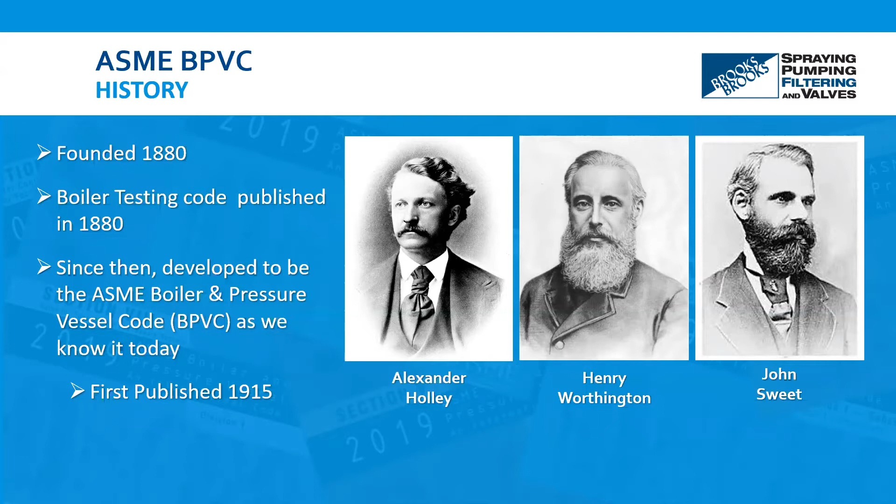A bit of history on how the ASME pressure vessel code came to be. The American Society of Mechanical Engineers was first founded by these three gentlemen, over the need for a unifying body to aid in the design and development of standard tools and machine parts. As industrialization led to increased use of steam boilers, there were unfortunately many incidents that led to injury or death, which warranted the eventual formation of the ASME Boiler Pressure Vessel Code in 1915.

It should be noted that there's always a tailwind when it comes to safer and sound design, and therefore the code is actually updated every 2 years to ensure that it incorporates new findings.

To recap the previous webinar on the ASME Boiler Pressure Vessel Code, its purpose is to help provide requirements as it relates to the design, fabrication, inspection, testing, and certification of pressure vessels at either internal or external pressures. For the purpose of this seminar, we'll be focusing on the pressure vessel side, which is section 8.

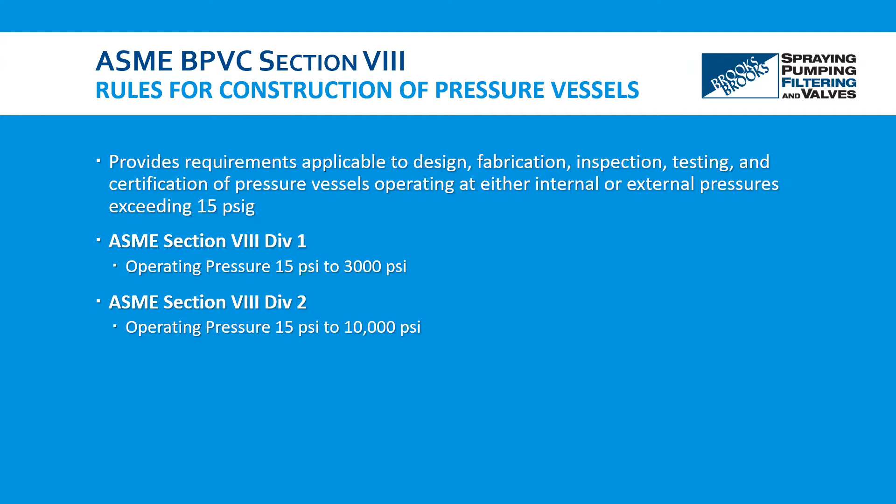Section 8 is comprised of 3 divisions. Division 1 is the most commonly used all over the world. Division 2 is specific for what's called engineered pressure vessels, and this requires additional methods for stress analysis. It also has a more elaborate scope of non-destructive examination and increased protocols on fabrication and material control. You can also see that it has a higher operating pressure allowed. Then section 8, Division 3, is specific for designs that are over 10,000 PSI.

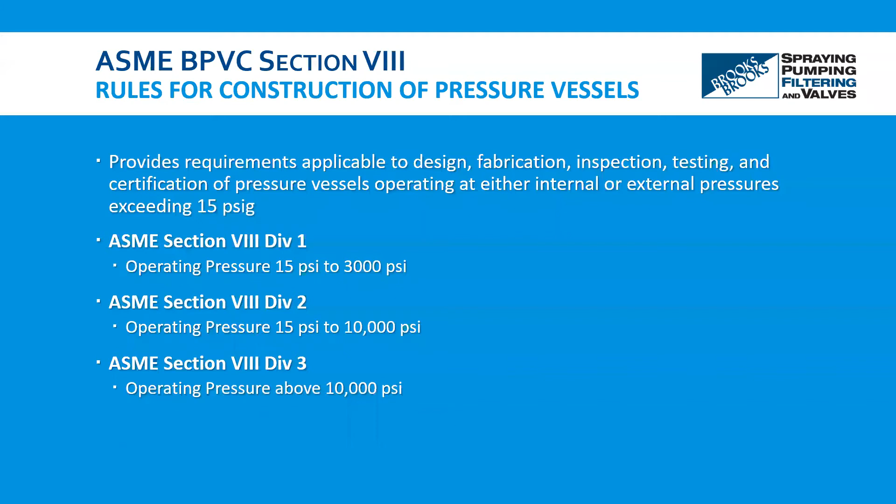When we're comparing different pressure vessel codes now, we'll be looking at divisions 1 and 2 only, as we are not getting into high design pressures over 10,000 PSI for division 3.

CSA B51 is listed here. It's not necessarily a different pressure vessel code, in the sense that it actually adds upon the ASME code and provides clarifications. As an analog, for those familiar with the Canadian Electrical Code, its short form is CSA C22.1. In this case, for boiler pressure vessels and piping, it's CSA B51. Then we have the Pressure Equipment Directive, EN 13445, which consolidates a number of parties and nations - British, Dutch, German, and French.

As you might imagine, it can be difficult to navigate through this code, as it actually points towards different other codes that are difficult to acquire. That's partially the reason why ASME is preferred, due to the ease of navigation.

And then finally, we have the PD 5500, which is the British standard. It's now superseded by the Pressure Equipment Directive. However, there are still countries that do utilize PD 5500.

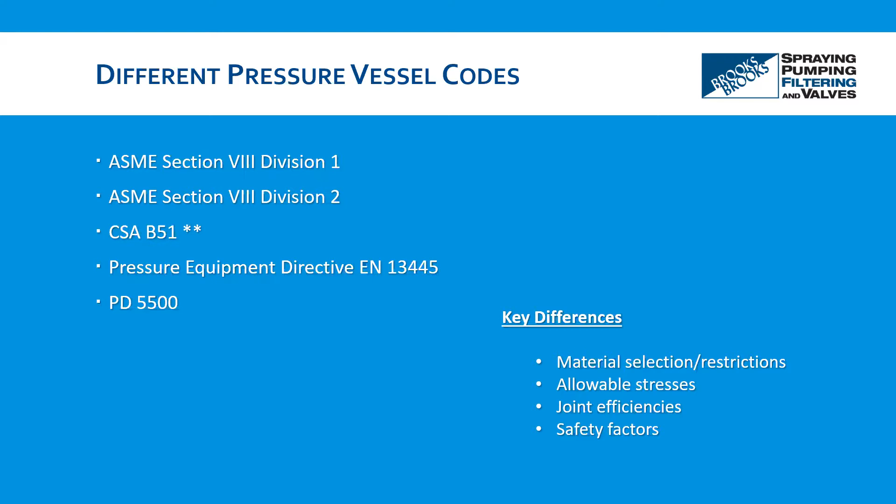Hey Annie, since we're jumping into a couple calculation examples soon, it's my understanding that part of your interview process was rather unconventional, in the sense that you were asked to perform code calculations. Oh, Annie, I think you might be on mute.

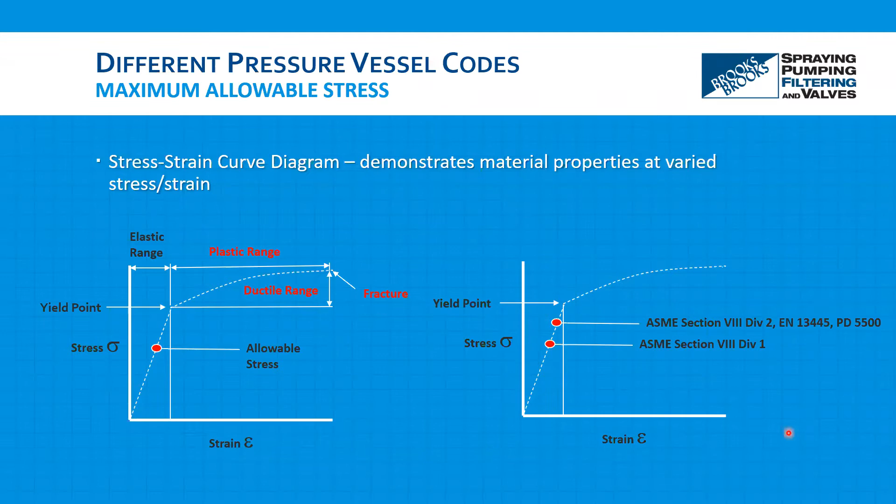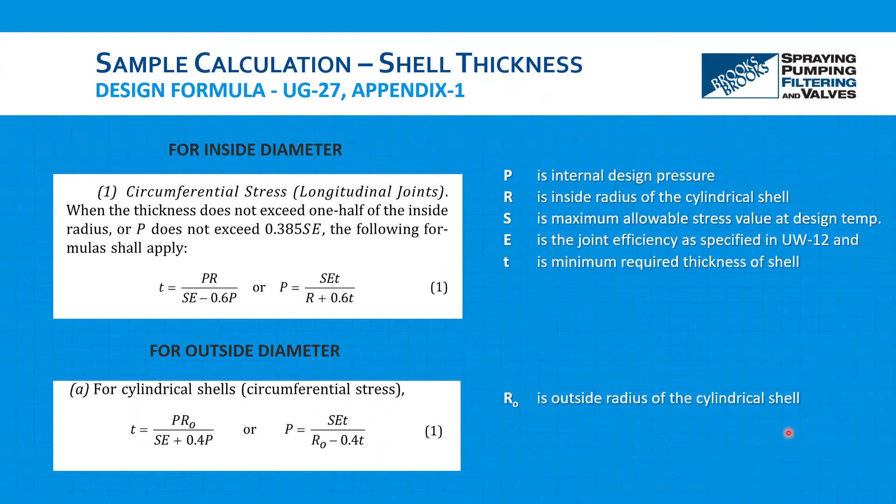Okay, design thickness, all right. Plug in the numbers, multiply, add that. Okay Annie, does that look good to you?

Yeah, for the design pressure of 200 psi and the outside diameter of 38 inches, you will get the thickness of 0.3159 inches. This is the minimum design thickness for that particular shell, so you need to choose the next available thickness in the market.

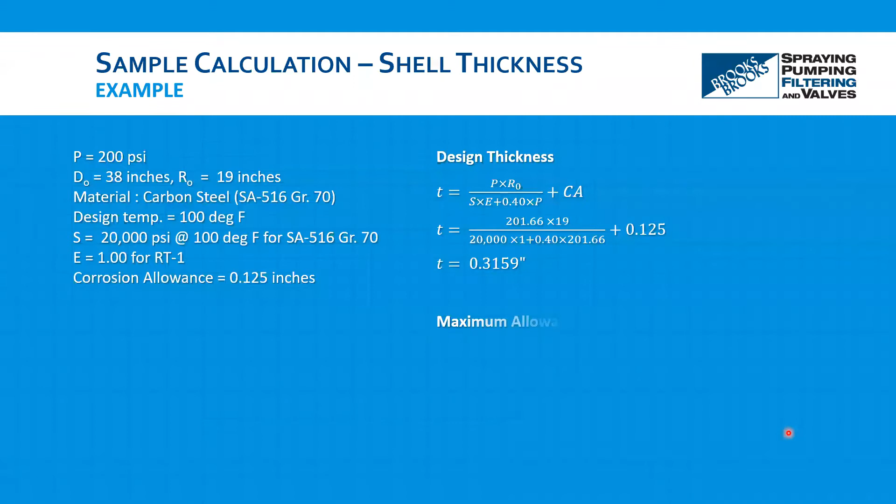Okay, thank you Annie. On to the maximum allowable working pressure now. This is the formula that we have to use. Plug in the numbers.

Okay Annie, does that look good? Yeah, this is the maximum allowable working pressure. So you need to calculate the maximum allowable working pressure for each component in the pressure vessel, which will decide the maximum allowable working pressure for that vessel, which depends on the weakest component's maximum allowable working pressure.

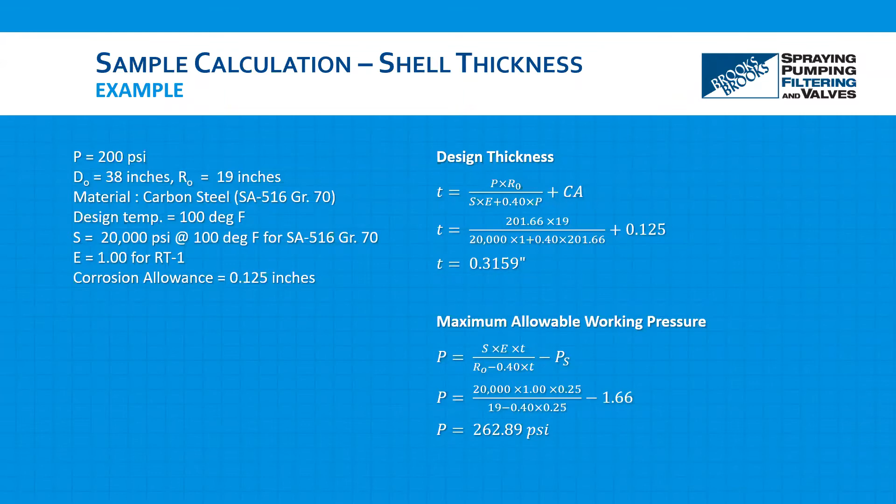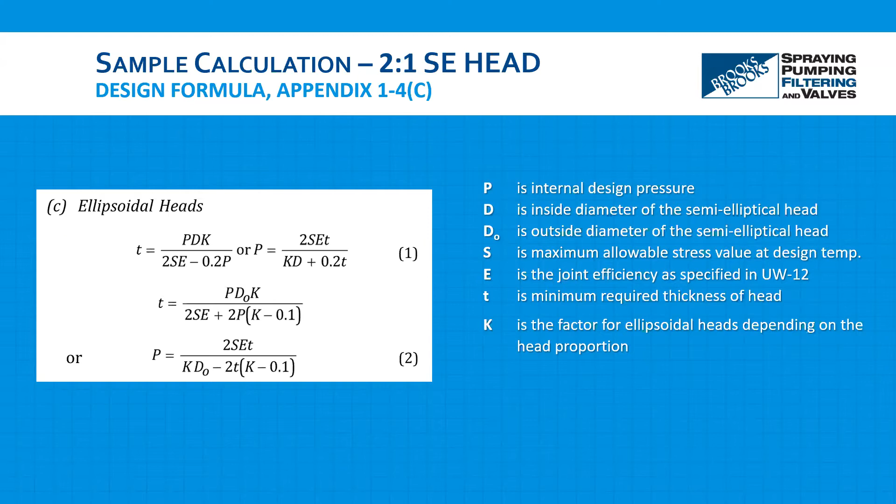Super, okay, we'll get into that now for the semi-elliptical head, and these are the formulas that we would have to use. Now that we have this in our toolbox, let's go ahead for the semi-elliptical head. It's the same design conditions as prior.

And this is the design thickness. So we got that, and we're now jumping into the maximum allowable working pressure. Based off the thickness and the maximum allowable working pressure, as Annie mentioned prior, the weakest component in this case, based off the design or maximum allowable working pressure, is the head, because this is less than the shell allowable working pressure.

This is but a brief glimpse into the calculations of the ASME code vessels. We do now have software that speeds up this process, and we'll go over an example here.

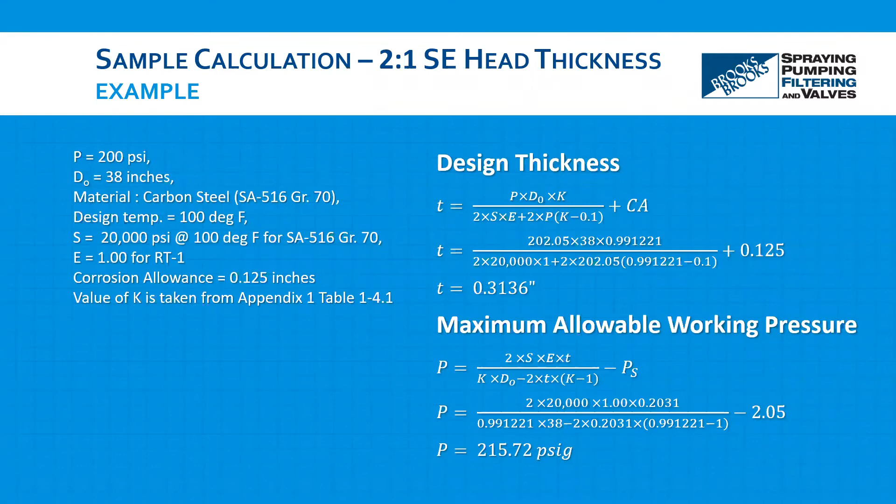As an example of what was done for software, you first have to design the model, input the pertinent parameters, material design, pressure, design temperature, minimum design metal temperature, are inputted into the program, and then you'll get something like this.

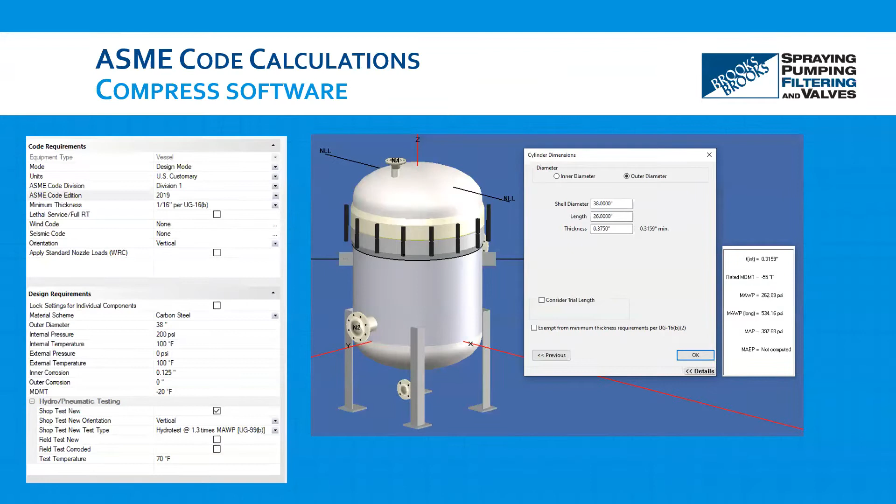If you recall the thickness and the maximum allowable working pressure that we calculated earlier for the shell, it actually matches. And since we're now familiar with some of the code calculations, let's see how they compare amongst other pressure vessel codes.

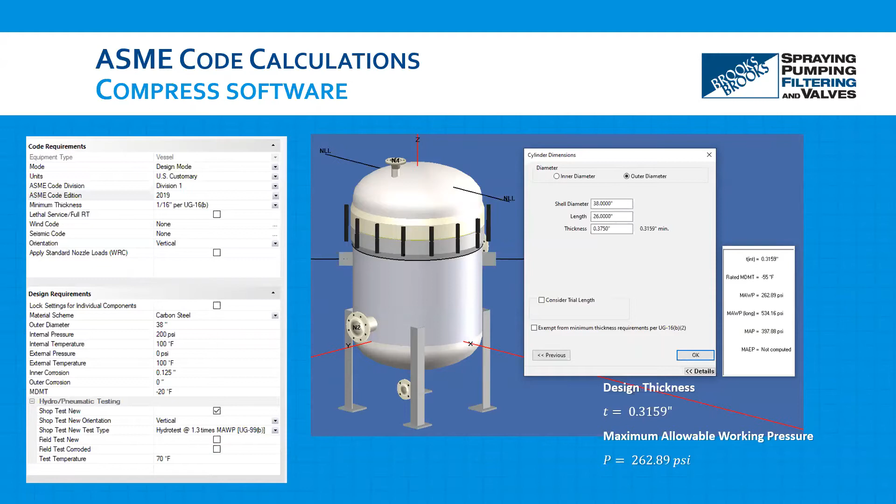To better emphasize the differences or lack thereof, here's a quick sample calculation to determine the thickness of a shell. Weld efficiencies are omitted here for easier comparison.

But as you can see here, the difference is negligible for division 1 and 2. However, remember that division 2 may call for additional testing on top of what division 1 calls for. The difference in thickness is made larger when dealing with higher pressures due to the way that the equation is set up. But in this case, the preference would ideally be division 1.

And then we have the European Pressure Vessel Directive formula for calculating the shell thickness, and you can see there's quite a difference here. Now, contributing reasons, as mentioned earlier, could be the type of material selection, allowable stresses, joint efficiencies, or safety factors being applied.

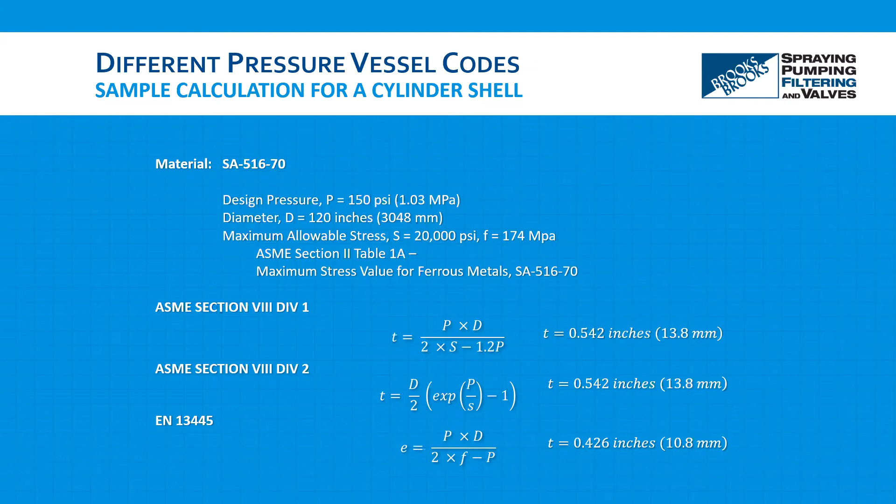What the CRN provides is a confirmation that the vessel conforms to CSA B51 requirements. The format is such that it starts with a letter, followed by three to five digits. These alphanumeric values are essentially the registration file number for the technical authority that has the design registration.

Now, if the vessel or fitting is registered across Canada, the letter C would denote that to be the case, although you still have to have the province that it was first registered in, who would do that registration across Canada.

Now, on to the question: when do we have to register our vessel? You can see here, it might be a bit overwhelming, but there's a number of decision trees to help guide in that decision making.

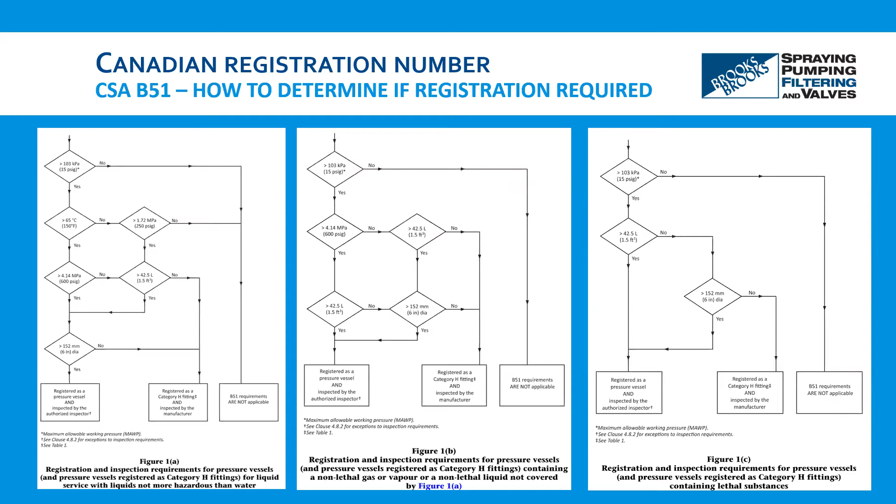And it depends on a few conditions, whether, for example, the liquid fluid is not more hazardous than water, non-lethal gas or vapor, or non-lethal liquid not covered in the previous. And lastly, we have vessels containing lethal substances, which is this.

Say we go through figure 1B, and from the design pressure, we find our design pressure is over 15 psi. The vessel will invariably have to be registered, and the subsequent steps would then help us determine whether it needs to be registered as a fitting or as a pressure vessel.

Let's say it has to be registered as a pressure vessel. What do we have to do next?

And once the application is received, it's assigned to a surveyor who will then review the design, and if there's no hiccups, they will approve the vessel for registration.

Okay, that was easy. After all that waiting, now we can start fabrication because we have CRN, right? That's not necessarily the case.

More often than not, procurement and fabrication begins in earnest once the vessel design is reviewed, certified, and stamped by a professional engineer. It's then released for purchasing and fabrication by the quality manager. Because the approval of the design registration may take several weeks, it's necessary to begin early to reduce delivery time. This relies on the fabricator being confident in their design, stemming from their experience with the code and wisdom gained in similar designs.

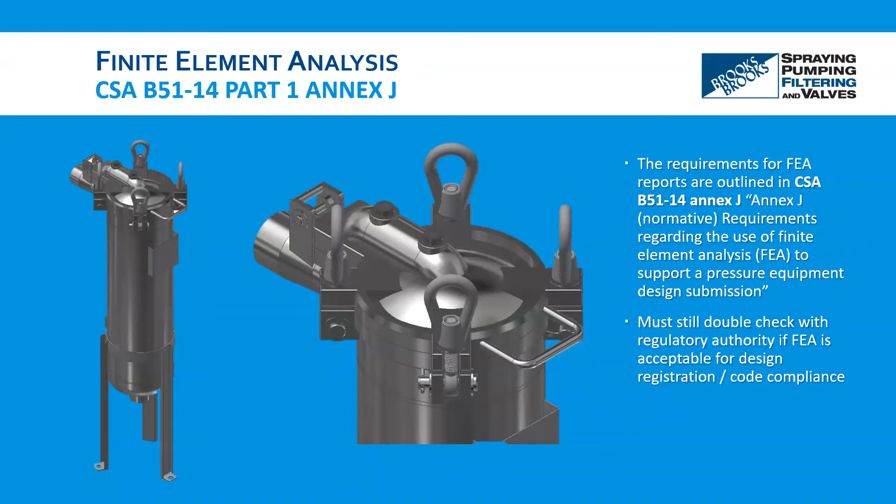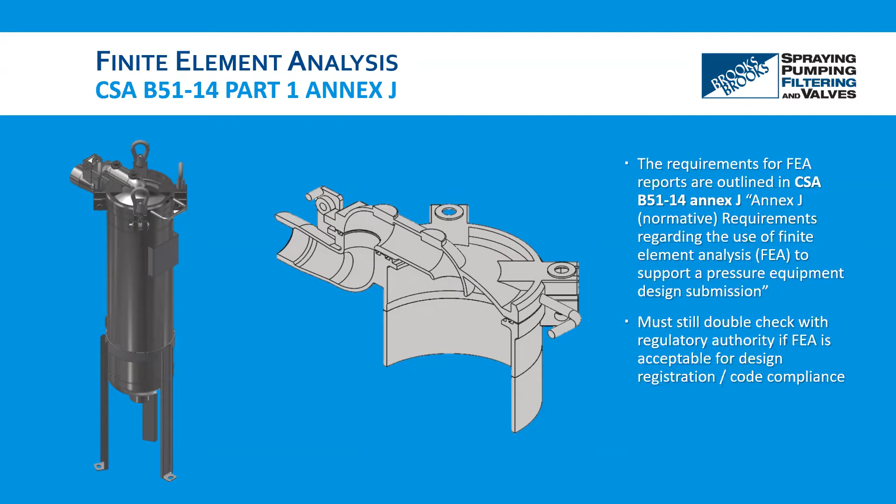Performing finite element analysis requires a fair bit of computer horsepower, and any way to reduce the number of calculations to help the program converge faster helps. In this case, the model is split in half due to its symmetrical design. Simplification of geometry whenever you're doing FEA has to be justified, and in this case, since it's symmetrical and the loads are symmetrical, you're able to cut it in half. Once a number of other parameters are inputted, a mesh is laid over the design.

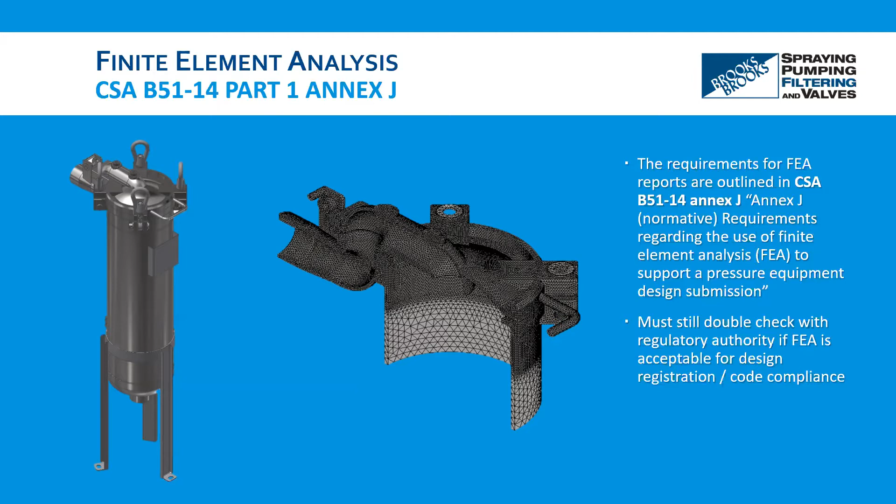You can see here a tetrahedral mesh is used, about a quarter inch in size, and then the mesh is further refined or made smaller at the head component to produce more accurate results. I also mentioned which part of the CSA code describes the requirements for FEA.

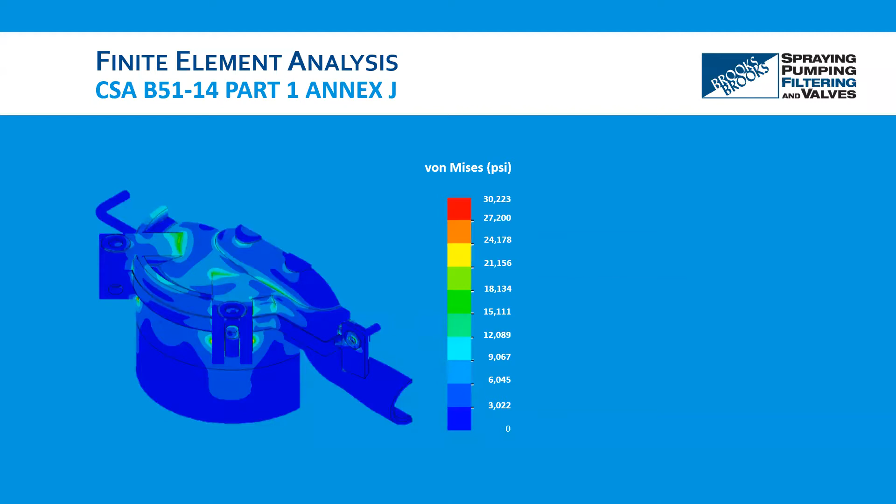Once everything is said and done, you will have a report that includes, among others, a stress plot. This plot has a description with color separation for the stress ranges. What we find here is that the castings are proven suitable for use, as the maximum values are under the allowable stress of the material being tested. In this case, this is stainless steel CF8M cast steel.

With that, you ought to have confirmation on the report that the design complies with ASME requirements, and the analysis and report may be used as an aid for design registration. There are other important results not noted here, such as resultant displacement, reaction forces, etc. So it's important to know this is just a small picture. And now that we have that, presumably you'll be able to get CRN.

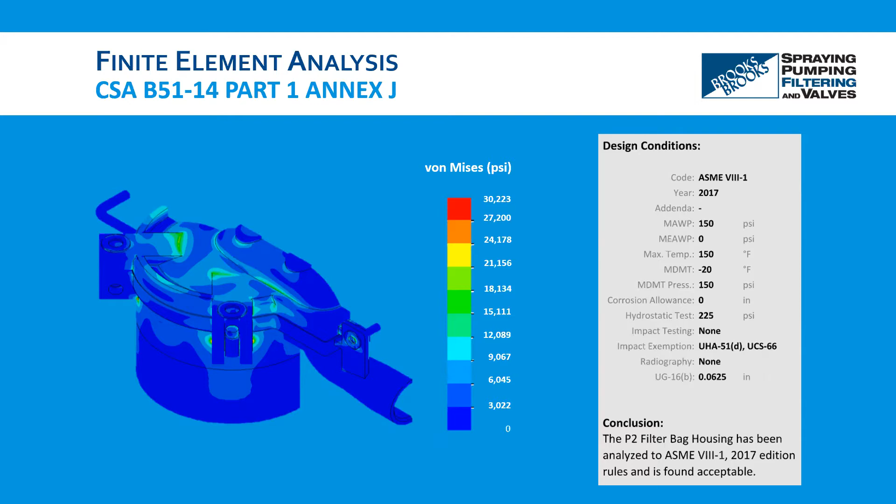We'll be switching gears now into the non-destructive examination aspect. This covers the different types of NDE and their applications, for example radiography, ultrasonic, liquid penetrant, mag particle, and ferrite testing. NDE is an integral part of the overall pressure vessel process, as it allows inspection of components without altering the material. That's a key thing here.

It's purposed to detect internal imperfections and provide quantitative and qualitative measurements that could potentially be out of tolerance. So there has to be criteria that must be inspected. It must be noted that the extent of NDE is usually determined by code, design, or customer requirements.

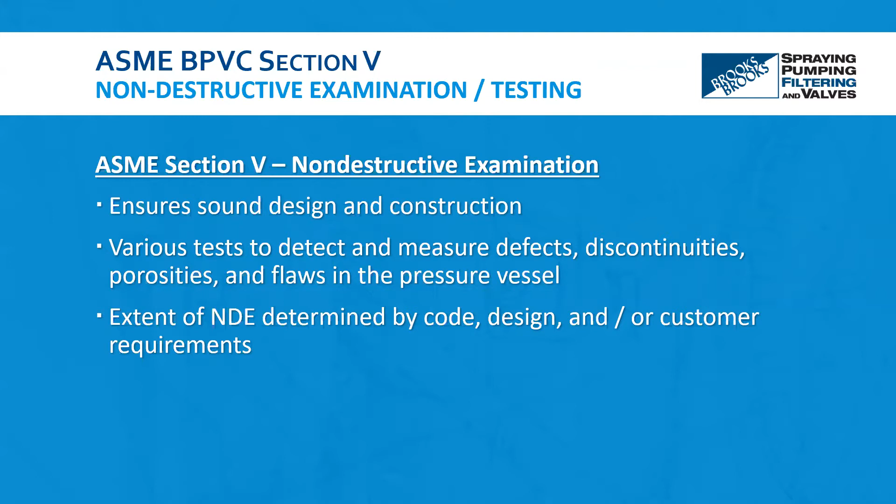Whoever would be doing the NDE must be certified by whatever provincial regulatory body the inspector is located in. This ensures that they're following the regulations within ASME Section 5.

As we have to be familiar with different welded joint types, we'll be going over them quickly per this illustration. First, we have category A, which is longitudinal welds, and you can see in this case we have them labeled accordingly.

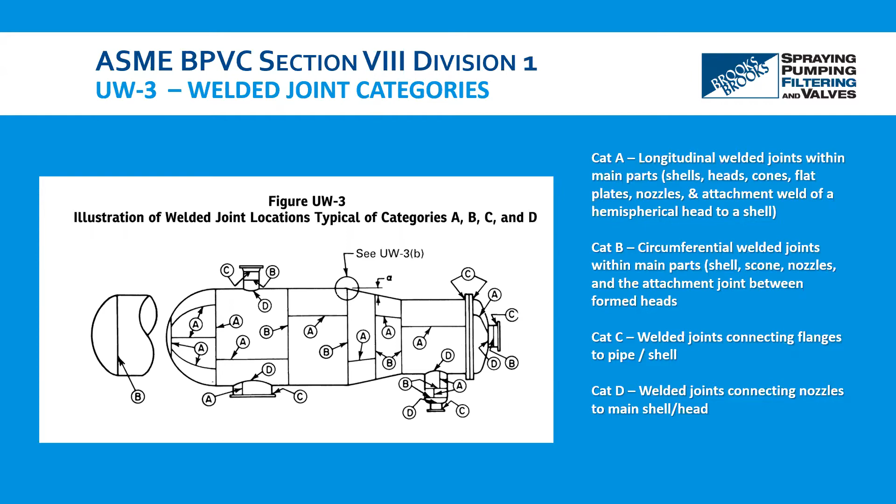Then we have category B, which are circumferential welds. Categories C and D are primarily for nozzles. You can see welds from pipe to flanges and head to flanges for category C, for example. For category D, this is for nozzle pipe to shell. We'll be going over an example here and how it applies.

Oh, okay, it's still jumping.

Now we can see the category A welds, which are the longitudinal welds, highlighted as yellow in this case. Then we have category C joints for the flange to pipe connections. They're a little bit hard to see. However, at the bottom, these are the nozzle to pipe connections. It should be noted that there would also be a category C weld here for this flange to pipe connection.

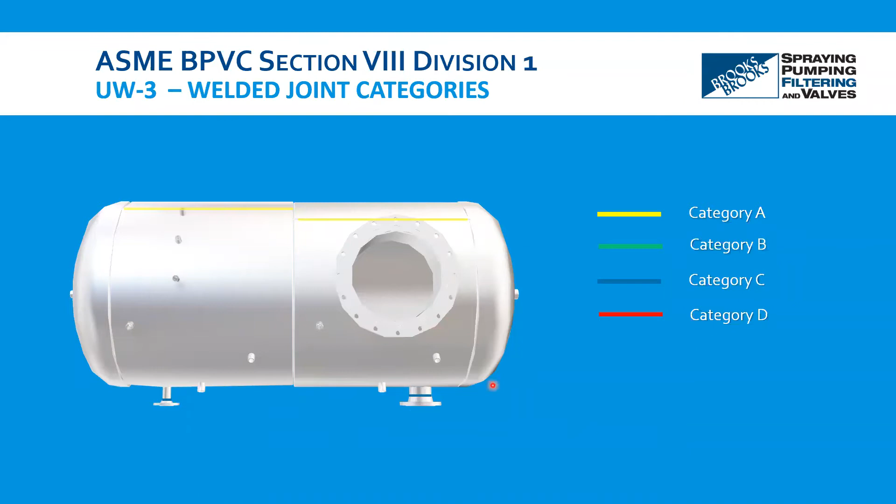The next concept we need to be familiar with is joint efficiency. You'll have seen this actually used in the previous calculations. The variable in this case was E.

This determines the material strength. Joint efficiency is used as a measurement of the welded joint with respect to how close it is to its material strength. Without implementing certain tests or inspections, the joint efficiency of a welded joint is actually less than the parent material. By conducting tests, you're able to bump that joint efficiency up by verifying the weld, and we'll see how this applies as it relates to radiography.

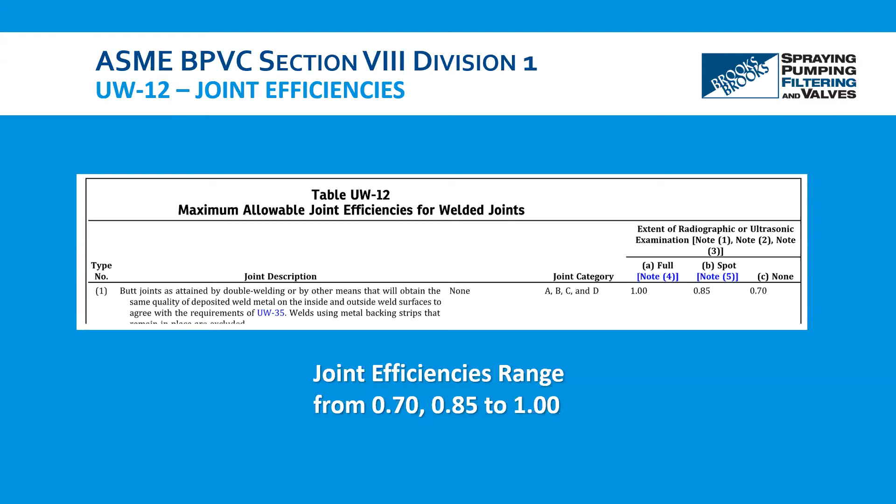The requirement for radiography is driven by this code, UW-11, and we'll first be looking at X-ray specifically as the source of radiation. This X-ray is actually not so different than what you would see at a doctor or radiologist, where you have the X-ray source that points towards an object of interest and the film behind it is exposed.

There are other sources of radiation available, such as radioactive isotopes, iridium-192, selenium-75, and they're used in certain cases. However, the preferred radiography method is X-ray.

Radiography may actually be conducted before and/or after post-weld heat treatment. Note that other NDEs would likewise be done before and after post-weld heat treatment, depending upon the design or customer requirements.

Now, why do we radiograph in the first place? The purpose of radiography primarily is to have quantitative and qualitative measurements of any faults or imperfections of the weld, and by doing so, that infers the joint efficiency of that weld.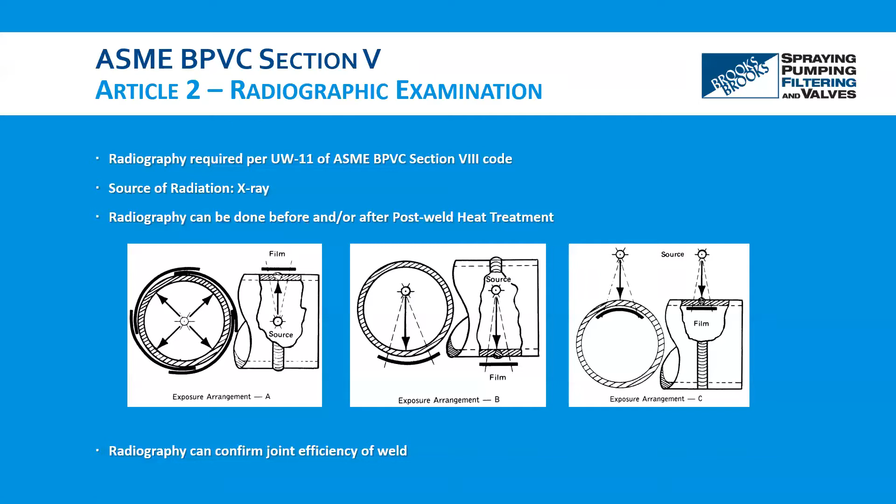Okay, thank you very much, Annie. So this is something that again, it is important to always refer to the code, as there's minor nuances that you have to be mindful of when you do have to implement radiography.

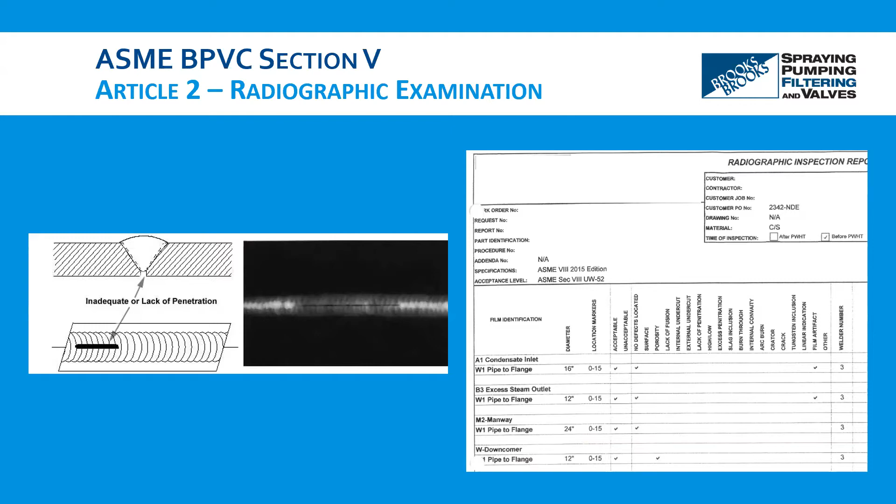A report would accompany this, as we have here, although it should be noted that this report is not associated with this particular film. It will identify which weld joints are acceptable, and if they are not acceptable, it will disclose why. However, it should be noted that in some cases it can still be acceptable even though there are notes, because it still meets within certain limits that allow it to be deemed acceptable.

Now, what effect does this radiography have on joint efficiencies? We mentioned it earlier, and here are a couple instances where you can see where the radiograph is done and what that does to the joint efficiency.

So for full radiography, or RT1, you have a joint efficiency of 1, in other words 100% joint efficiency. RT2, you have a different configuration where there's only spot welds on the circumferential welds, or category B welds, and then radiography on the full length of category A welds, or the longitudinal welds.

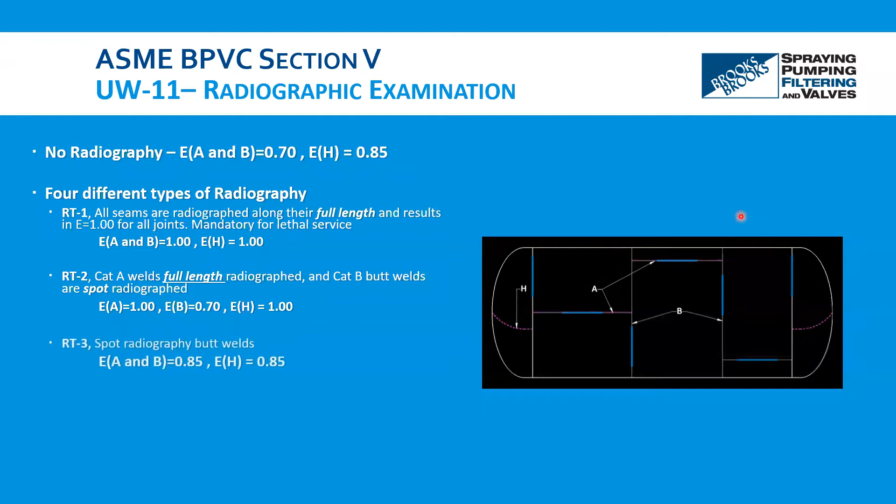Now RT3 is, for the most part, all just spot radiography on category A and B welds. And it allows a joint efficiency, in this case, of 85% for all joints.

Now, Annie, if you can please add some detail on the radiography options, because I know it's important in the software, and what options do we have?

In complex calculations, there are all the options available for radiography, like full radiography, spot radiography, and even no radiography, as per Section 8, Division 1, UW-11. So you need to choose any one option based on your requirement.

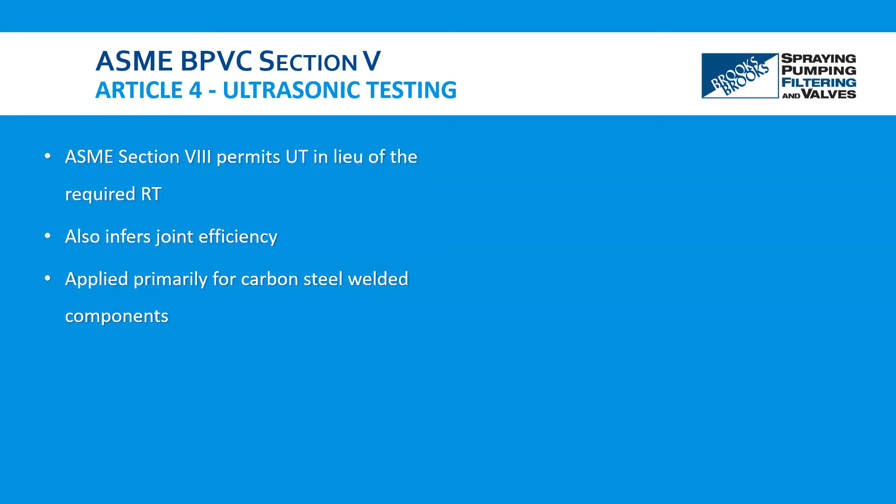Ultrasonic testing may also be employed to confirm joint efficiency of the joint. Now, a caveat to ultrasonic testing is that it may be difficult to implement on a stainless steel vessel, due to the fact that whenever the ultrasound encounters the stainless steel material, it encounters severe attenuation, which could lead to incorrect readings. That's why it's actually preferred for carbon steel.

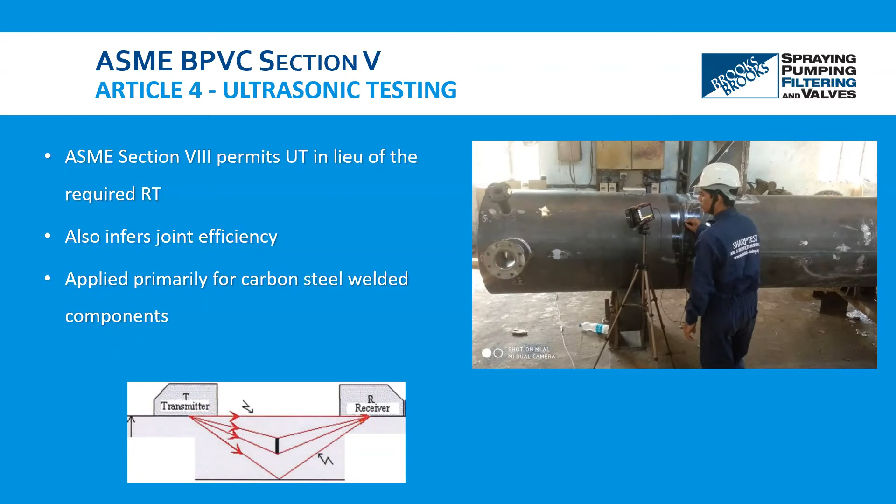And we can see the setup here where it is employed. You have a transmitter and then a receiver. This configuration is typically employed, and now we're going to look into how that might be implemented in a report.

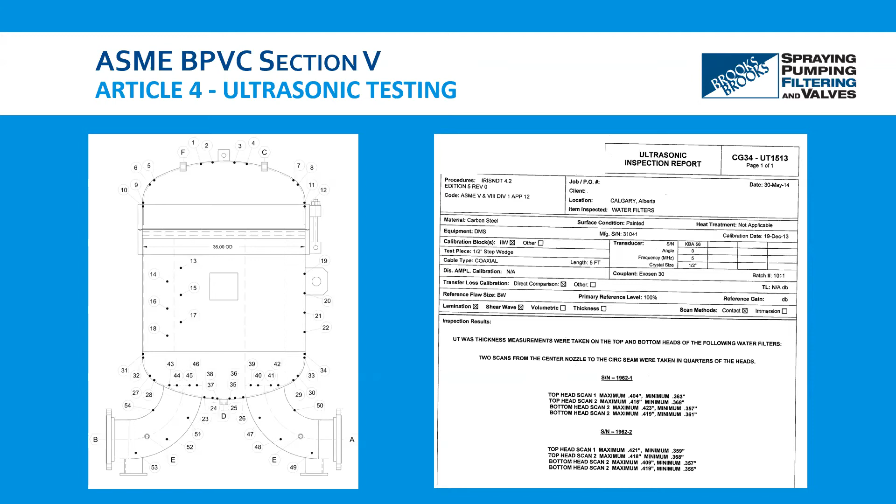On to liquid penetrant testing now. Liquid penetrant is actually one of the most popular NDEs. It's frequently used due to its friendly procedure and guidelines, and the requirement is laid out in this particular section of the ASME code.

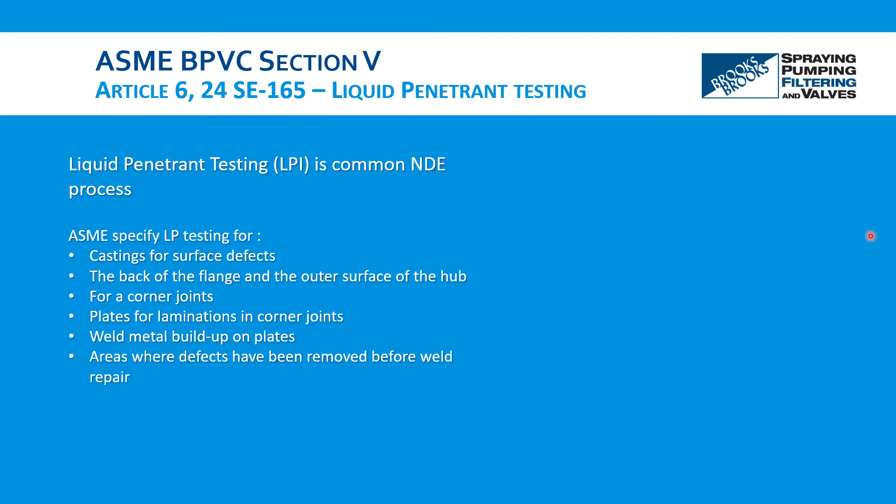We also have a list here of some parts that would be employed if the code requires, and depending if certain criteria are met.

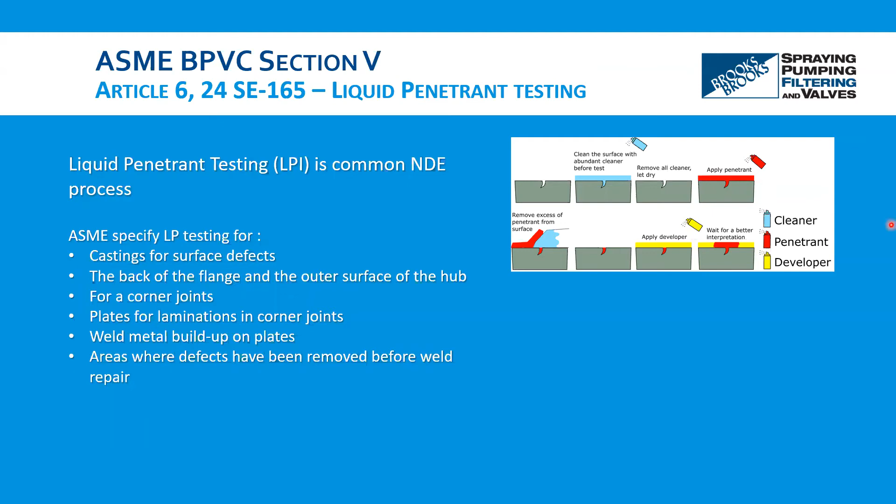And then once the surface is cleaned of excess penetrant, a developer is then applied, which over time will change in color, as you can see here, as red.

And now on to magnetic particle testing. It's actually similar to liquid penetrant testing. Magnetic particle examination is frequently used as an NDE method, owing in part to its low cost to perform the test. However, it should be noted that it's only contingent on the material being ferromagnetic.

If the material cannot be magnetized, then this test won't work. Mag particle testing checks for surface discontinuities, but it actually also reveals discontinuities slightly below the surface.

You can see here the figures below where a magnetic field is being run through a material. The top one is nice and straight. However, once we have a defect, as you can see in the bottom figure, the magnetic field is altered. By then adding magnetic powder or particles, they're able to adhere to that surface.

Giving a quick visual check to verify discontinuities. Mind you, there are other NDEs, we're barely scratching the surface here. There's, for example, ferrite testing, PMI. It's something that, in the interest of time, we'll be covering at a later point if you would like.

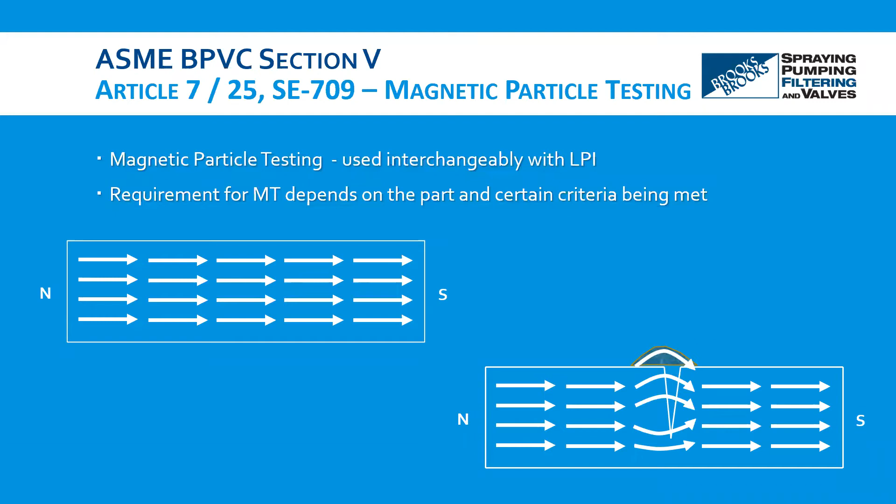Now on to destructive testing. There are various other destructive testing that may be done, but in this case we'll be looking at impact testing specifically.

The other destructive testing, just for your interest, could cover, for example, tensile testing, hardness testing, proof testing, or burst testing. And for this particular case, impact testing, we're looking at it specifically as it's important because of its relation to the minimum design metal temperature or low temperature designs.

Impact testing, what it actually is, it tests the amount of energy absorbed by a material during fracture. This energy absorbed is a measure of the given material's toughness, and it acts as a tool to evaluate the material's behavior in the temperature-dependent ductile brittle transition.

Impact testing is infrequent for the most part in industry, though when it is required, it is an expensive endeavor for multiple reasons. More often than not, that's why you'll see in pressure vessel drawings an exemption noted as listed here, denoting the fact that it will not be required to conduct impact testing.

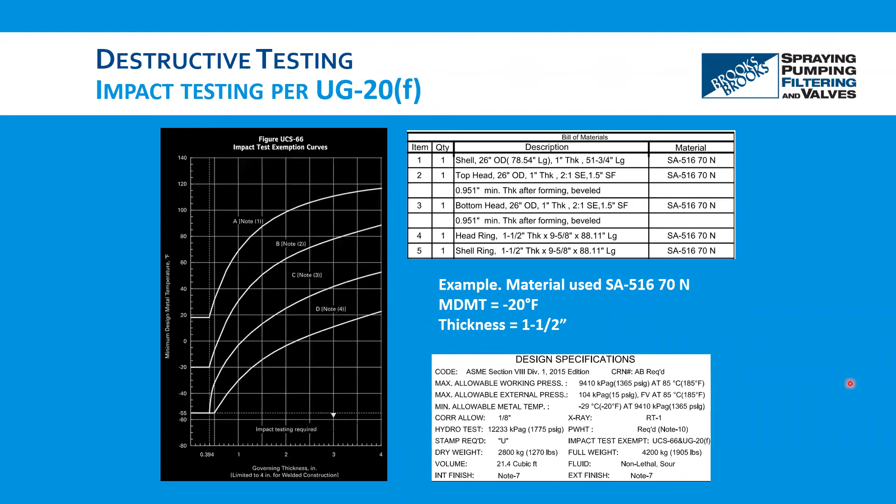Now, if the vessel were to be purposed for install in Canada and say the minimum design metal temperature were to be less than -50 degrees Fahrenheit, we actually have no choice but to conduct impact testing.

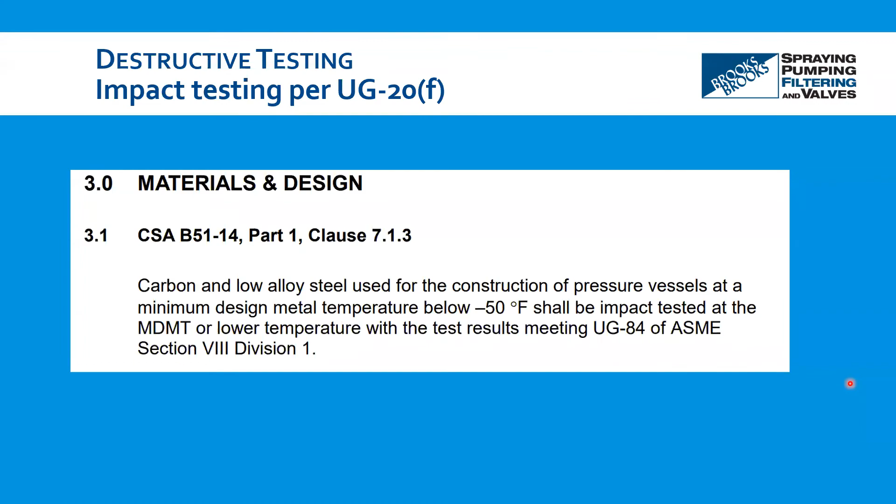And with that, we open the table here for questions. Again, it should be noted that we had covered quite a bit of content here, and we've only scratched the surface. This is the tip of the iceberg, so to speak.

The ASME boiler pressure vessel code, all these sections together, is north of, I think, 16,000 pages. That's why it's important to work with designers and fabricators that are familiar with the code and have licensed engineers on retainer, and have fabricators that hold an ASME certificate of authorization.

Thank you, Nicco. There are a couple of questions. If you don't mind, should I go ahead and put some questions there? Yes, Richard, I just want to make sure that you're able to talk. Yeah, Richard is unmuted as well. Yeah, I'm here. Can you hear me? Yes. Okay, and if we need, we also have our shop manager online. We can also allow him to talk at some point.

So let me start. The very first question here is, what's the difference between working pressure and burst pressure?

Nicco? Yeah, Annie, if you would not mind, please, Ashley, please answer that.

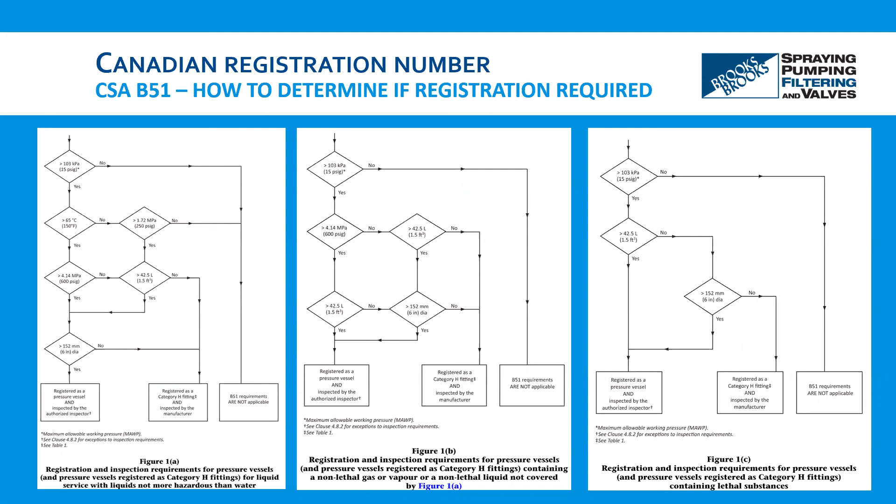What mandates RT3 versus RT1? Nicco, I think you had a slide there, you might want to go back to it. The slide that was presented doesn't necessarily explain when it is required. Annie might be able to shed more light on this, but what usually dictates spot radiography, or in this case RT1 full radiography, is if you're dealing with lethal fluids - it's full stop, full radiography.

You have no choice, for at least vessels to be installed in Canada. This ties into the charts we were looking at earlier, where for lethal vessels, you have to register it, and within the CSA B51 code, as well as the ASME code, it does mandate full radiography.

Nicco, I think Zlatko is on the panel. Zlatko, would you like to add something if you're there? With the radiography, it depends on the designer - when he designs it, you can actually use it.

If you want to lower the thickness of the material, you can go with full radiography, which is up to the designer, or it depends on the pressures and temperature that the code will tell you - hey, you have to do the full RT. And it depends on the customer. The customer can come and say, hey, I only want a RT3 or RT4 or a full radiography.

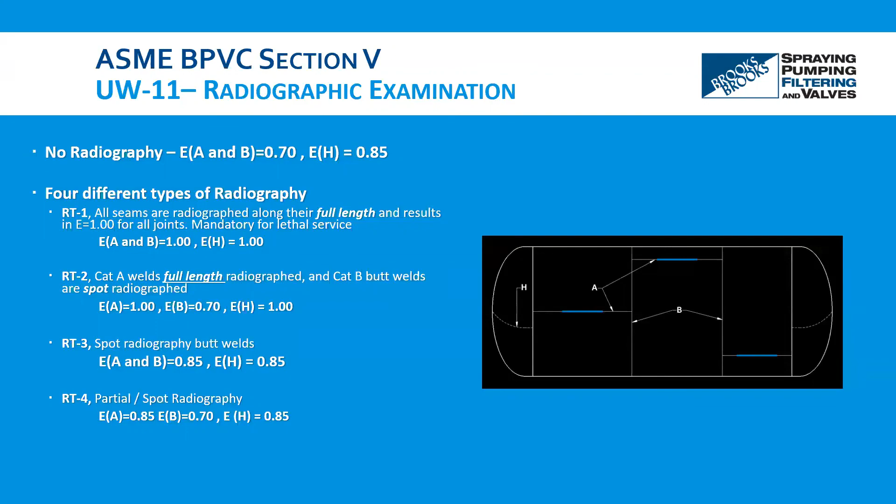I think we're pretty much running out of time here. Nicco, if you want to give any conclusion. One question came in if you want to answer it - is joint efficiency a function of weld quality, the metal itself, or the extent of radiography - spot, partial, or full?

Spot radiography, RT4, full radiography - those determine joint efficiency. It doesn't have to do with the metal or weld quality. So the answer is joint efficiency is a function of the extent of RT, not weld quality. Joint efficiency can be 70%, 85%, or 100%, which is RT1.

Same with spot RT, which is RT3. With RT4, you're just taking an extra piece or two, depending on the customer's requirements - he may say, hey, I don't just want a spot RT, I want an extra 2 or 3 pieces. So when you're stamping it on your plates, you have to specify by the code whether it's RT3, RT4, or RT1 - what you did on that vessel.